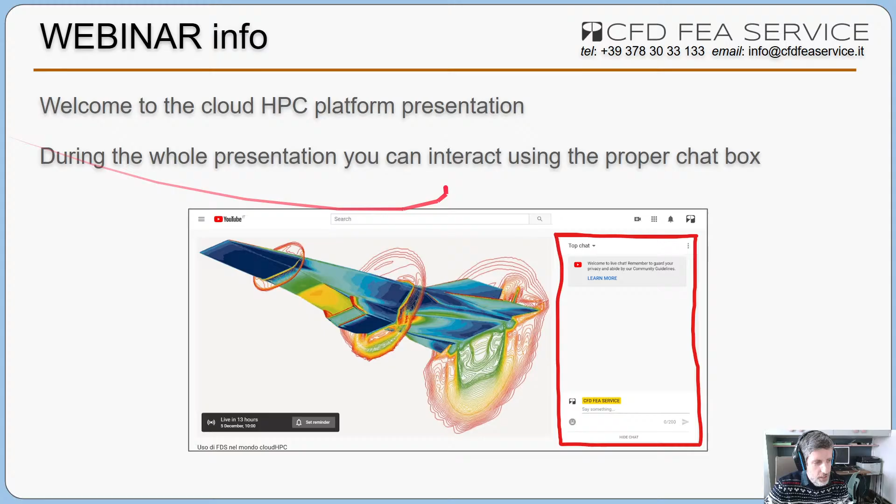Well, let's start by presenting myself and the company I'm working for. The company name is CFD FEA SERVICE. It's an Italian-based company founded in 2018. We operate in three main areas. We work in software development, in particular as far as engineering applications, both mechanical and civil engineering applications, are concerned. We have among the software developed a portal named Cloud HPC, which is somehow the protagonist of today's webinar. And then obviously we perform some consulting engineering activities in both mechanical and civil engineering applications.

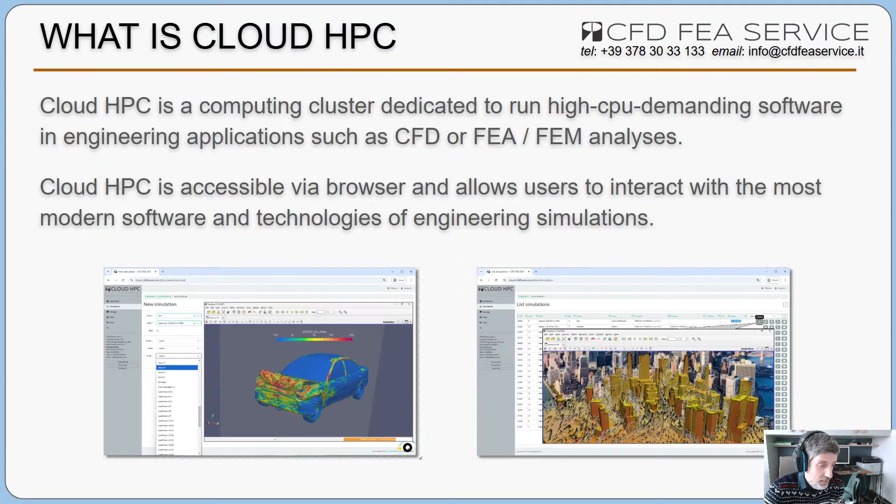What is the Cloud HPC? Cloud HPC is a portal where you can rent hardware resources to perform CFD and FEA analysis, but in general engineering simulations that are often highly demanding in terms of hardware resources, and as a consequence it's difficult to have at all times and in all situations hardware in-house to perform this analysis. So on the Cloud HPC you can easily submit jobs on the cloud using a pre-configured server or cluster dedicated to engineering simulations.

The benefits of the Cloud HPC are, first of all, that it is completely configured for engineering applications, so you can get everything ready to run for CFD, FEA, and several other simulation software. There are no subscription fees. Everything is billed according to the actual use you have performed every month. And obviously there are no configurations or installations because everything is made available through a browser.

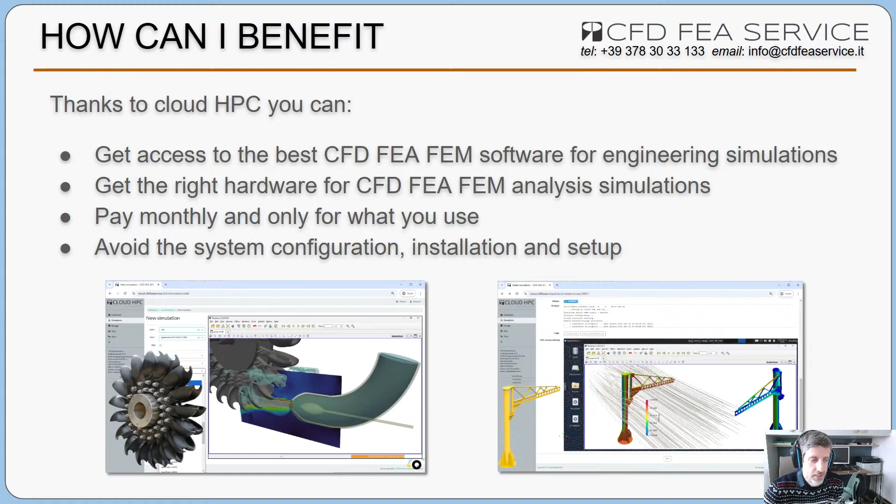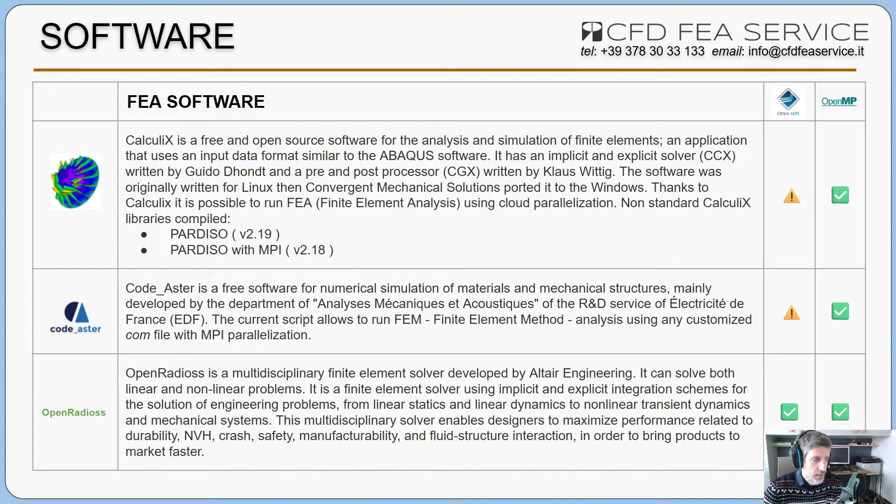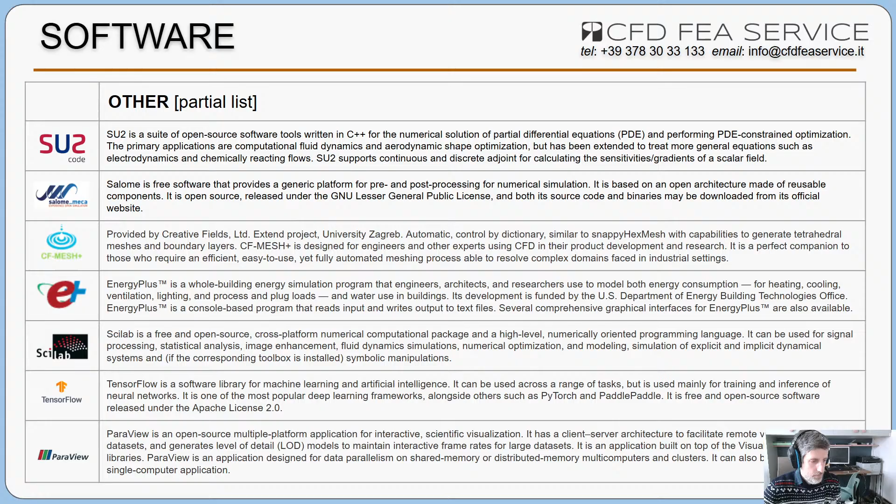As far as FEA analyses are concerned, we have CalculiX, Code_Aster and OpenRadioss, just to give you a quick overview. And they are all compiled with MPI, so it is possible to have full parallelization using this software. And then there are plenty of other software: SU2 and other CFD solvers, very tuned for adjoint optimizations. We have several software to perform meshing, like Salome, cfMesh Plus. We have EnergyPlus, which can be used for energy equilibrium inside buildings, Scilab, ParaView for post-processing of data, TensorFlow, PyTorch as libraries that can be implemented for artificial intelligence. And today we will see how we made most of these tools available in an easy form.

In terms of hardware, currently the base hardware is AMD EPYC Milan, AMD EPYC processors with a frequency of 3.3 gigahertz. And these are available for most of the instances you're going to run on the Cloud HPC. Or if you want a premium, a more efficient processor, you can use Intel Xeon Emerald Rapids, and soon also the AMD EPYC Turin. These processors are both capable of almost twice the computational power compared to the AMD EPYC Milan, because this is like the fifth generation of processors.

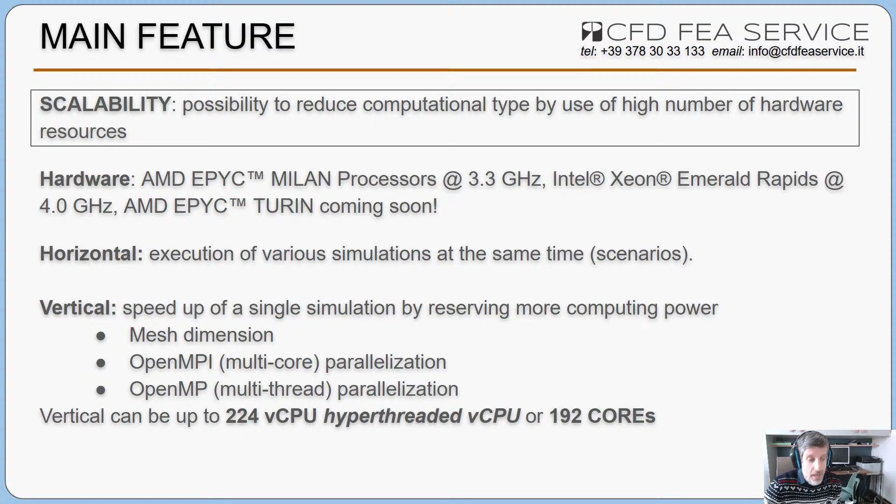On the Cloud HPC, it's possible to execute several scenarios at the same time. There are no limits on the number of scenarios you can perform, so theoretically you can perform hundreds of simulations at the same time, and for every simulation you can allocate up to 192 physical cores dedicated to that specific simulation.

We have on top of that some dedicated tools, which we are going to mention later in the presentation, which are specific workflows to simulate what? Well, turbomachinery, for example, there is turboApp; valves, safety valves in particular, ValveFlow; car parks for fire and smoke extraction. We have BestGate for injection molding definition. So all of these are specific tools that can speed up your simulation, and in particular each of these tools is dedicated to one software. So in turboApp, for example, you can use OpenFOAM. tenuFEM, for gasket analysis, is basically an interface for Code_Aster.

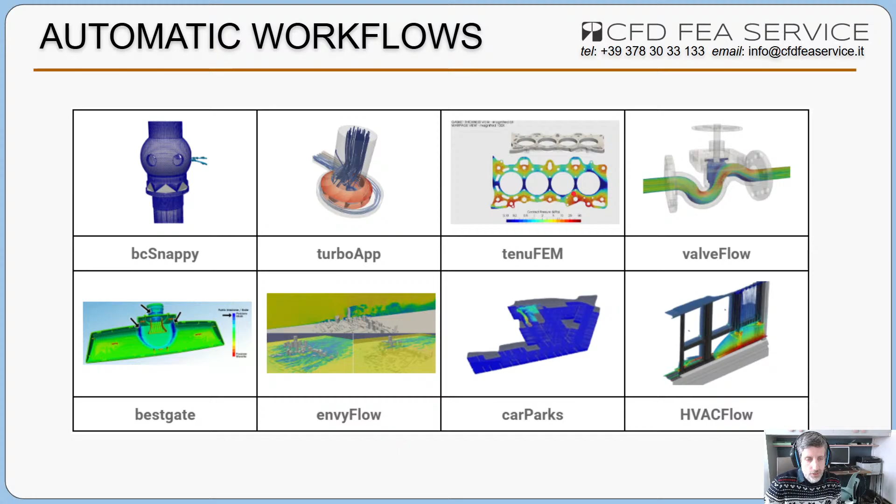And then there are several ways to interact with the cloud HPC, and I want to stress the possibility to get real-time support, because every software installed on our platform is a software for which we have all the skills to use that software. So most of the times users can actually get support not just on how to get their simulation performed quickly on the cloud HPC, but also on how they can set up a case correctly, if a certain boundary condition is better or worse than another, and so on.

So let's go now to our example of CFD and AI coupled simulation, and let's see what we want to do in order to perform these simulations. I don't know how many of you are familiar with these tools, maybe with CFD most of you, but artificial intelligence and machine learning are getting commonly used in engineering applications just in recent years. So it's worth having a plan of what we have to do in order to train our own machine learning model.

Well, everything starts obviously with a CFD analysis. In today's example, we are going to talk about turbo machinery, so a simple fan. So we need to set up a case in CFD analysis for a turbo machinery. That's the first step. Second, we need to generate a relatively high number of geometries, each of which represents a variation of the initial turbo machinery geometry definition. Then, for all these geometries, we have to perform a CFD analysis. This will create input data that are going to be used to train a machine learning model. And we're going to see also what training a machine learning model means.

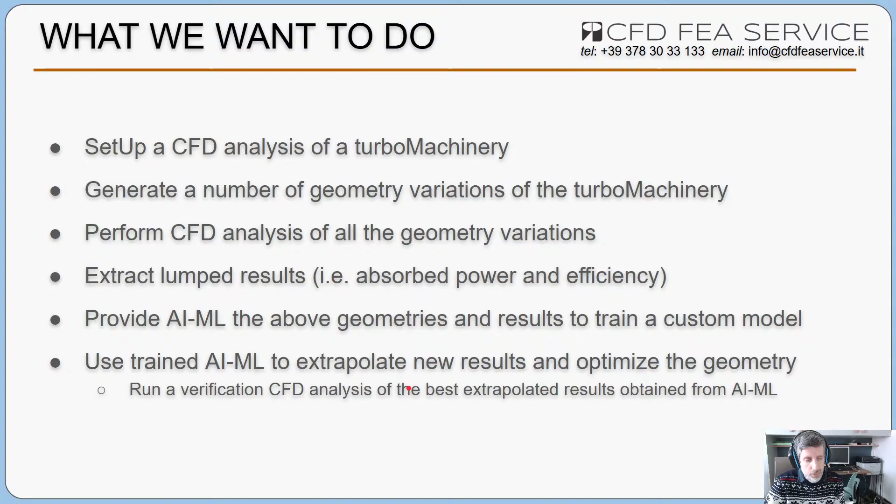So the optimized geometry won't be any of the geometries that have been pre-simulated in the second step, but will be a new geometry given by the machine learning trained model. And then eventually we will also run a CFD analysis to verify if the data extrapolated by the artificial intelligence is actually consistent with the CFD results.

Well, let's start, because obviously everything can be done from scratch if you're a programmer, but we provide as CFD FEA Service a number of tools that can be used to speed up or make it easier for you to achieve all the steps. So let's start with TurboApp. TurboApp is a workflow that basically allows you to input a CAD file, set up with relatively few data the mesh and boundary conditions, and using this information, the output is the whole results of a CFD simulation, but on top of that, you get a CSV file with concentrated parameters, the lumped parameters I mentioned before, like flow rate, torques, absorbed power, efficiencies.

And they are monitored on control surfaces like the inlet of the simulation, the outlet, and the impeller. So this is a workflow that is already pre-configured in order to perform this type of simulation. So what we need to do is set up the geometry and set up the input parameters for this analysis.

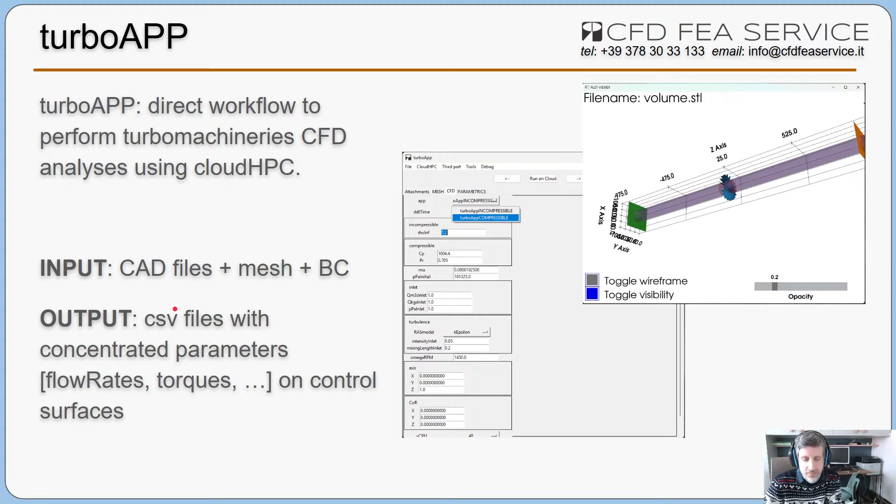And so thanks to the parameterization, you can specify the several flow rates in meters cubed per second you impose at the inlet and obtain as lumped parameters in the CSV file the produced head by the impeller. That's one way of using the parameterization. A second way is the geometry variation.

For example, you want to perform several geometry variations of the impeller, so monitor, for example, the angle of attack, the diameter of the impeller, the number of blades on the impeller, and monitor how the head is varying according to these parameters. This is called geometry variation and can be performed automatically in TurboApp. So you just have to upload the geometries you want to simulate, and it will automatically submit several jobs with the geometry variations. Obviously, these two parameters can be merged together.

So I want to simulate several geometry variations, so several geometries, and for each of these geometries I want to extract the whole QH curve, so several flow rates. It will end up performing several cases, but we will get results for all these cases in an Excel spreadsheet.

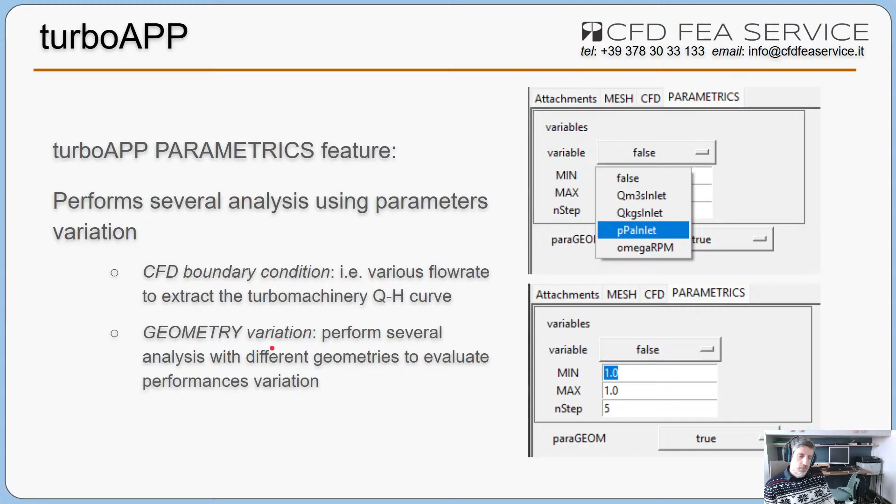Obviously, an input we have to provide is the geometry variations. TurboApp is not able to modify the geometry. We must already provide TurboApp with a set of geometries. To do that, in-house, since we have licenses of Solid Edge and Microsoft Excel, we developed an internal algorithm that has a parametric Solid Edge geometry.

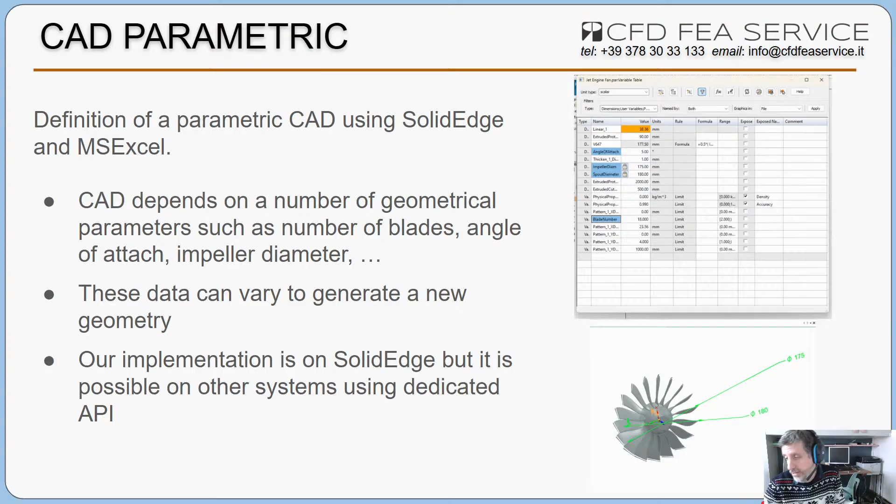And using basically a spreadsheet, it is possible to vary the parameters of the impeller, such as angle of attack, diameter, the gap between the duct of the impeller and the tips of the blades of the impeller, and the number of blades of the impeller, and so on. We have developed a methodology that from Excel spreadsheets, thanks to a macro, automatically saves all the geometry variations of the impeller that are displayed over here.

So basically, in this case, these Excel spreadsheets define the angle of attack, impeller diameter, spout diameter, so the pipe diameter, and the blade number, and each of the rows in this table is then converted into a specific geometry. Each of these rows can be classified as an X, as a sort of independent variable. So the geometry is actually represented by this set of parameters, which are converted thanks to the Excel spreadsheets, the Excel macro and the Solid Edge functionalities into a geometry.

Here I'm mentioning Solid Edge a lot of times just because we implemented this under Solid Edge, but the same methodology can also be applied to other free open source CADs like FreeCAD, but also commercial ones.

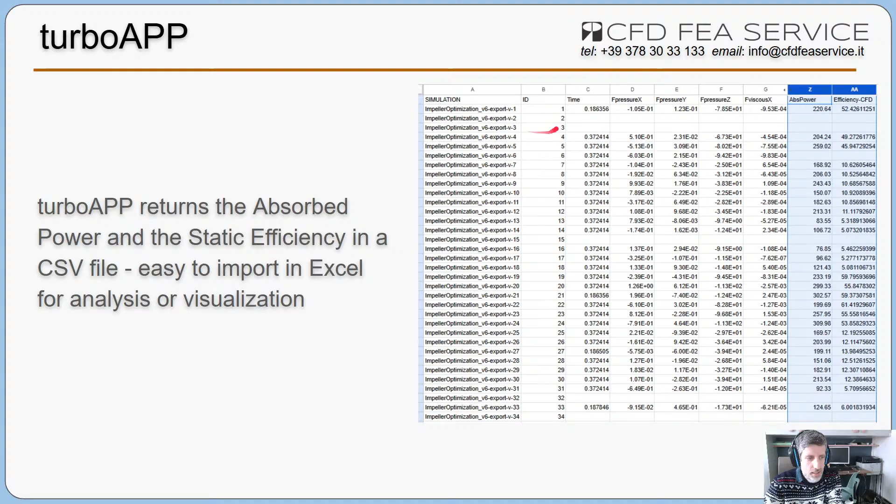That's an example. And all this data, like impeller optimization version 1, means that it refers to the first geometry, to the first set of parameters. Version 2, the second set of parameters has a second ID in here, the third set, fourth, up to the 34th. So there is a link between the results produced by the CFD simulation and the set of parameters we started from in order to obtain the geometry and eventually the results of the CFD simulation.

So at this point, we need to abstract a little bit to understand what we are doing and what the artificial intelligence, in particular the machine learning, is going to do. So what we did is setting 4 parameters: angle of attack, impeller diameter, spout diameter, and number of blades. We performed a CFD simulation and we obtained the absorbed power and the efficiency of the impeller.

So we can see the CFD simulation as a sort of black box, as a sort of function that takes the input data of our geometry and using that function produces the absorbed power and the efficiency of our impeller. So if we knew what this function was, we would be able to provide a new set of parameters, input angle of attack, impeller diameter, spout diameter, and blade number, and obtain the power and efficiency without computing the CFD simulation.

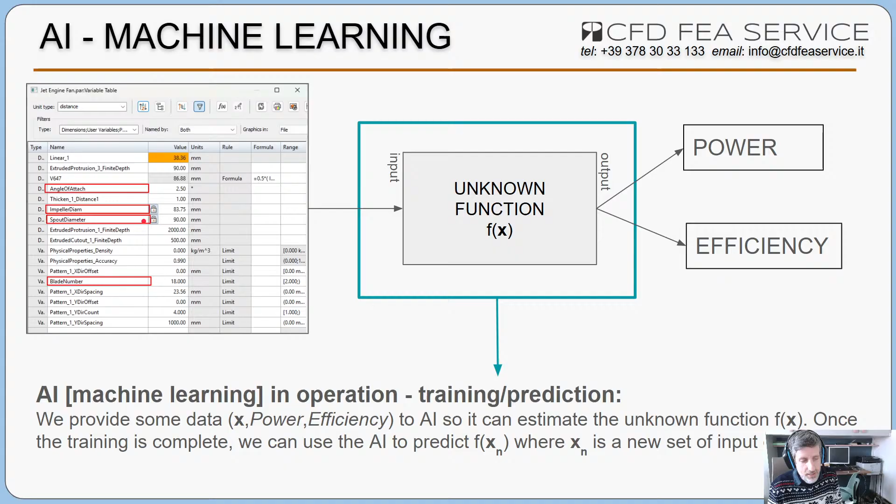Instead, in this case, we are reducing the number of CFD simulations, and we use this reduced number of CFD simulations to perform a regression model. That's really what we are doing. And then we use this regression model trained with artificial intelligence in order to estimate several other geometries.

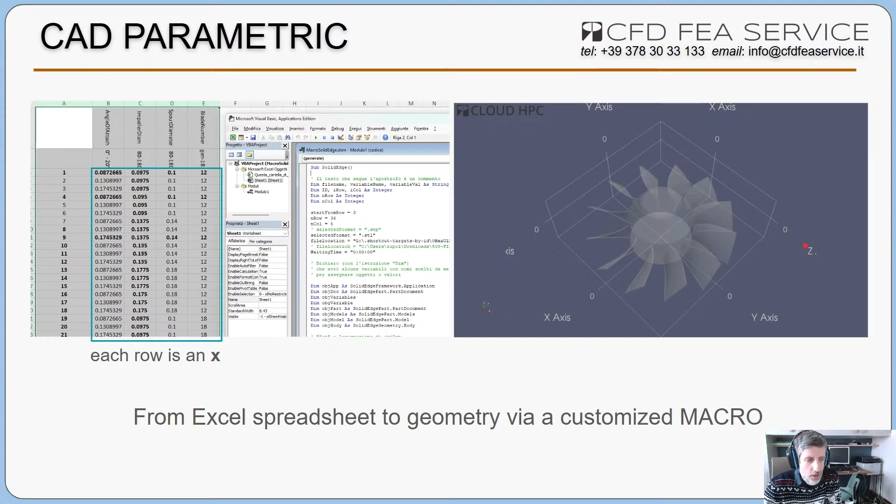So as per what we said, we had to merge the results obtained by TurboApp with the input data of the geometry into a single Excel. The input Excel will be made of the geometry parameters and obviously the output data. The output data come from a CFD simulation. Obviously, the geometry parameters are those that we use to evaluate the CFD results. These are the input data, or the data on which we are training the machine learning methodology.

There is another question. At the end, you got the response surface methodology, where you can grab the optimal design. Is that correct? Yes, that's what we are doing, or that's what basically we can generate with this methodology.

So once we have these data, which are fundamental for the training of the machine learning, we can use a second tool named Claudia as our, let's say, artificial intelligence methodology. So we use the CSV file of the input data, and we also need to enter a prediction data set. So a list of rows, another Excel basically, where every row represents a new data set point where we want to make the evaluations of the pressure, of the absorbed power, and the efficiency of the impeller. So the artificial intelligence will use input data to train the model and prediction data to actually perform the prediction.

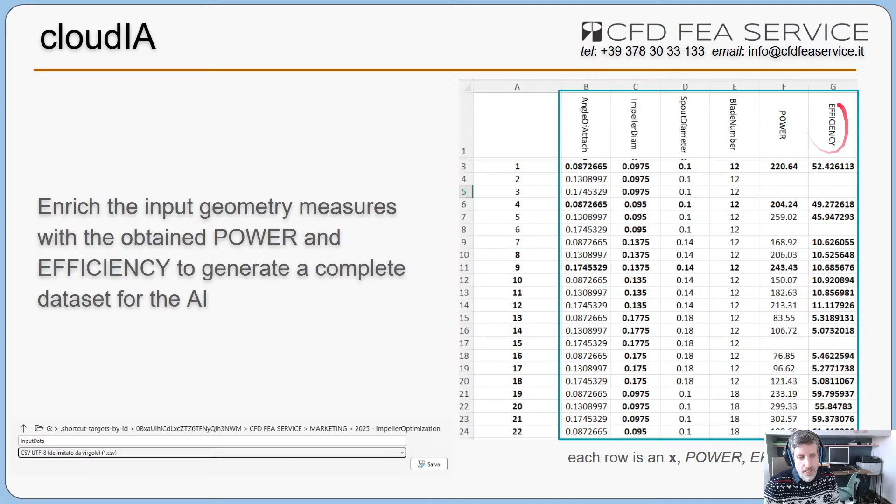And then we have to set the targets. So basically the system must know that power and efficiency are actually the data we want the artificial intelligence to be trained upon. The blade number is not our target. We have power and efficiency, and so we have to specify that we have two targets. One is efficiency, and the other one is the power. This target name must be coherent with the field name in the input data of the Excel.

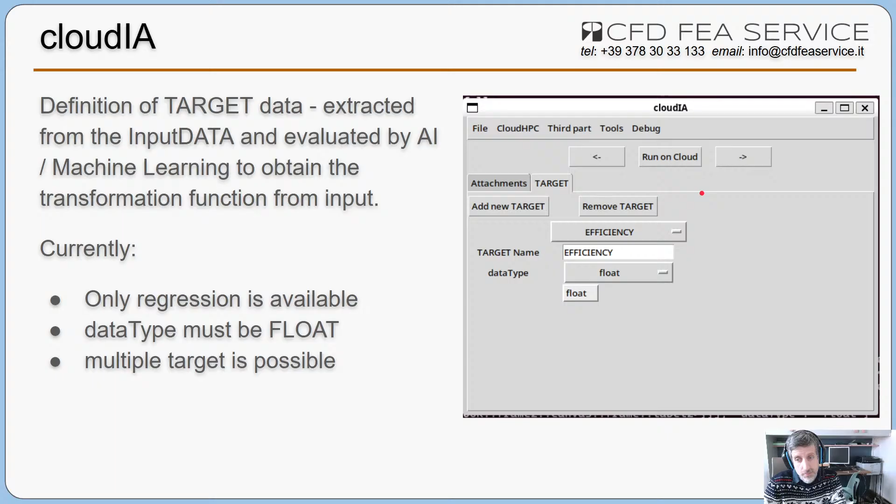Once we have done that, let's say this is not really a simulation, but we can run this cloudIA algorithm, which will train the method and at the same time will also evaluate the results on the predictions.

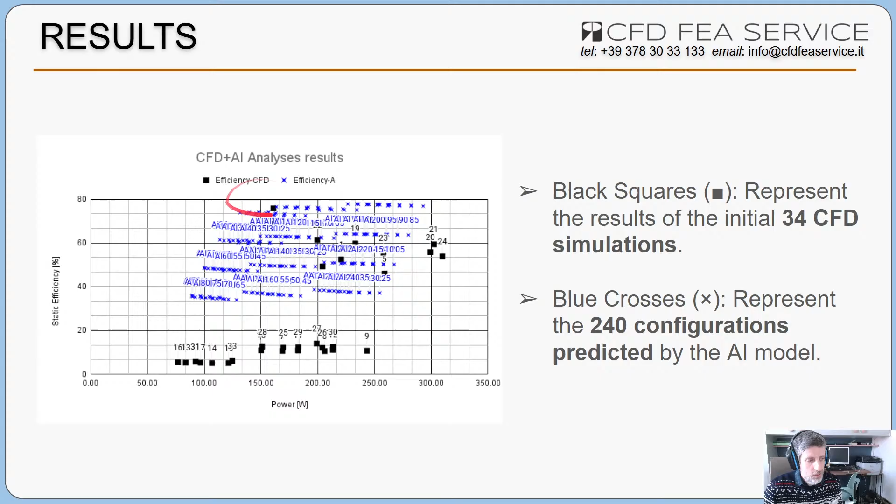And all in all, thanks to a combined CFD and artificial intelligence methodology, we performed more than 270 simulations. If we had to compute everything with CFD simulation, it would be not critical, but at least costly in terms of hardware resources to be used on the cloud or remotely. But in this way, with quite a limited number of CFD simulations, eventually we were able to get very good and very optimized results given the initial conditions.

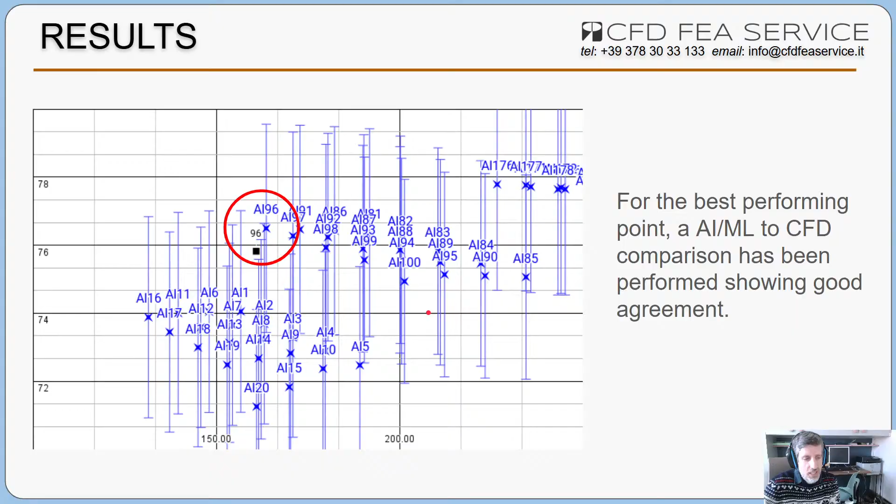So yeah, this is how you could use the tools mentioned. In particular, today we saw two tools. One is Turbo App, and the second tool was cloudIA. They both rely on CloudHPC, so that's the third tool, under which we were able to perform the CFD part, but also the artificial intelligence training and estimation of the results.